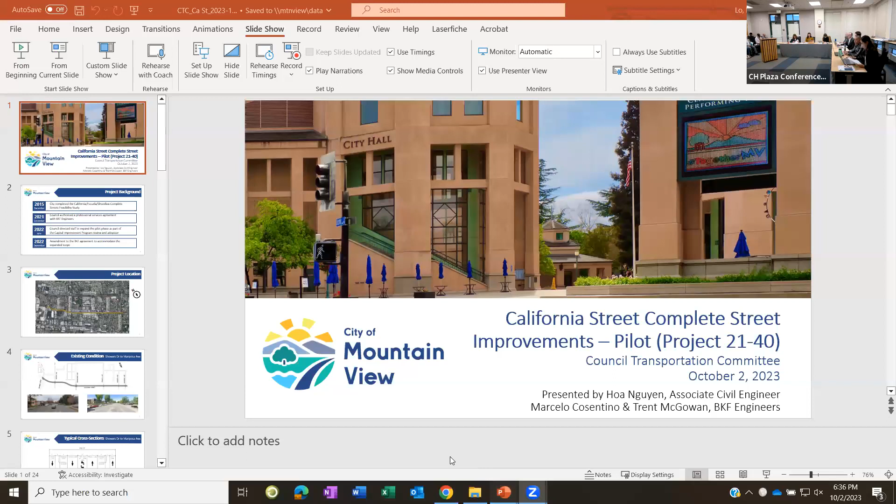Good evening, everyone. Good evening, committee members. My name is Hoa Nguyen, I am an Associate Civil Engineer with the Public Works Department. I'm here today to provide an update on the design of the pilot phase for the California Complete Street Improvements and to obtain feedback from CTC on the corridor layout, including vertical elements. Joining me in this presentation are Marcelo Cosentino and Trent McGowan, design consultants from BKF Engineers. Next slide, please.

Background: In 2015, staff completed the California Escuela Shoreline Complete Street Feasibility Study. The objective is to create safe, comfortable, convenient conditions for travel modes, including automobile, pedestrian, bicycle, and transit, starting out with a pilot program using pavement markings and temporary improvements.

In December 2021, Council authorized a professional services agreement with BKF Engineers for designing the pilot phase with limits from Showers Drive to Ortega Avenue. In June 2022, Council directed staff to expand the project limits to Shoreline Boulevard. In September 2022, Council authorized an amendment to the BKF agreement to accommodate the expanded scope for this pilot phase. Next, please.

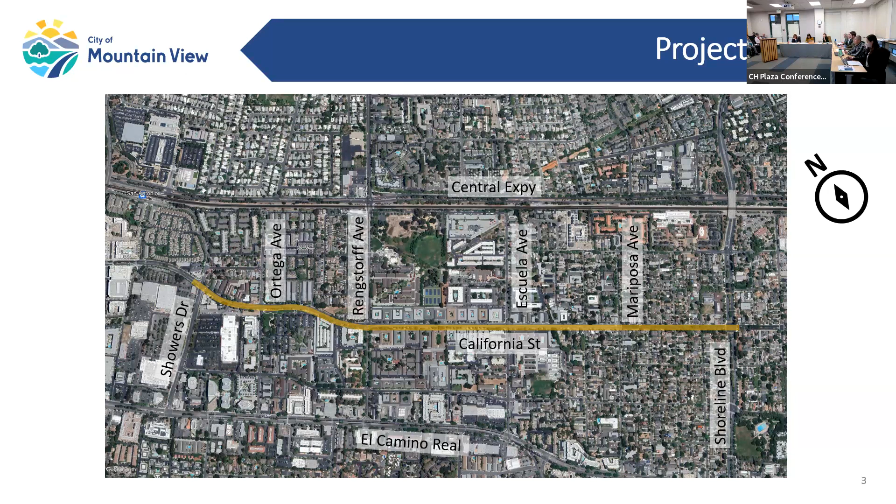Next slide, please. The existing condition can be split into two segments. The first segment is Showers Drive to Mariposa Avenue. The corridor has 2 through lanes in each direction, parking on one or both sides, and in some areas a 2-way center left turn lane. In this segment it's primarily multifamily housing.

There are striped bike lanes next to the curb if there's no parking, or between the parking and the through lanes. There are some challenges on this corridor, including high speed of vehicles, limited crossing opportunities for pedestrians, and minimal bike infrastructure. There's no buffer between the parked cars and the bikes, and no buffer between fast moving vehicles and the bikes. There's also frequently delivery vehicles that block what is left of the bike lane.

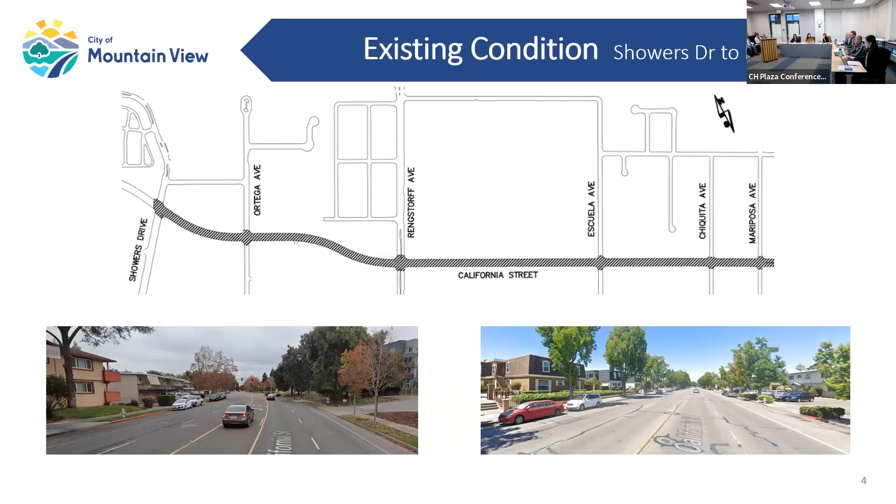Next slide, please. Second segment is from Mariposa Avenue to Shoreline Boulevard. This segment is primarily single-family homes. The center of the road has a landscape median that will stay, along with all the landscaping in it. This segment also has 2 lanes in each direction, parking on each side, and a bike lane striped between the parking and the travel lane.

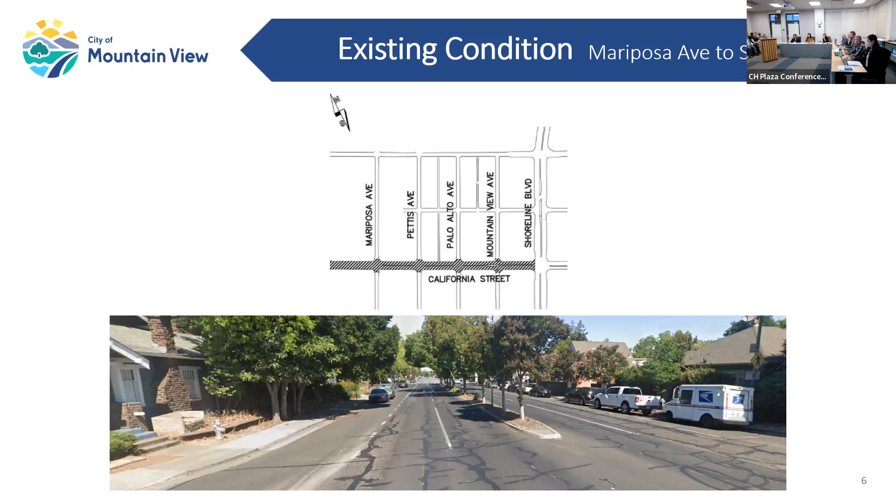To continue talking about improvements, I'll pass it to Marcelo. Thank you, Trent. Good evening, community members and attendees.

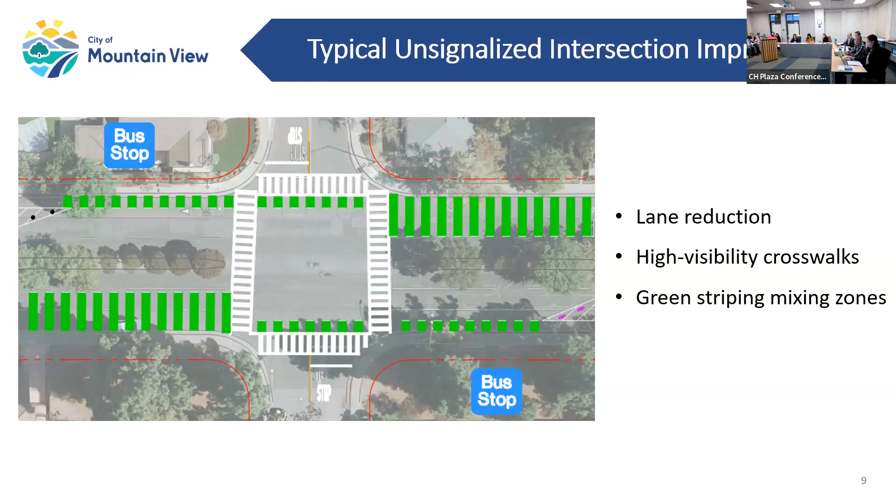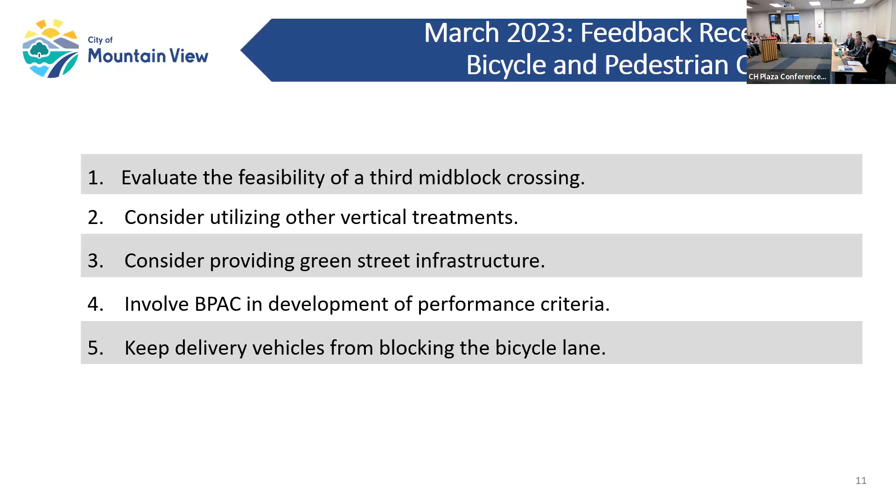Next slide, please. Now we'll walk you through the corridor so you can see where we're applying these vertical elements. We're doing this to test the different vertical elements and see how they function along the corridor. With the parking protected improvements and vertical elements, we expect there will be a loss of on-street parking to accommodate this new configuration.

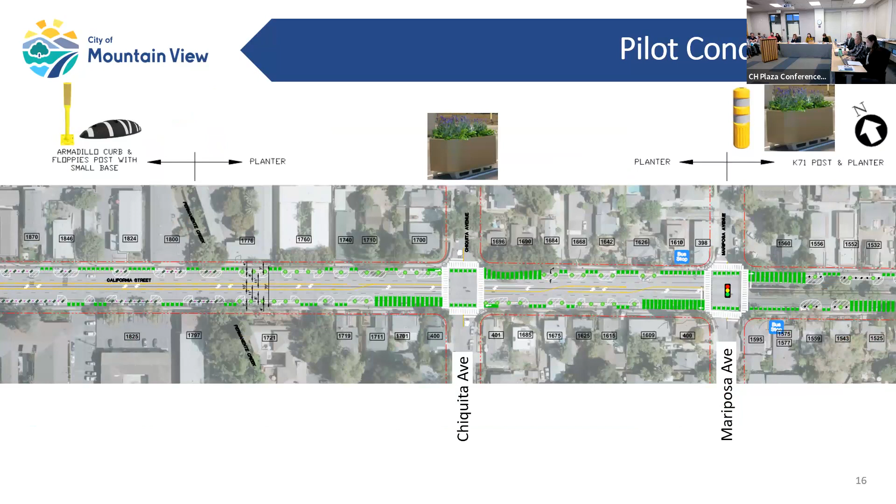Next slide, please. From the mid-block east of Chiquita to Mariposa, we're installing planters. And from Mariposa to Pettis, we're installing K71 posts and planters.

From Pettis to Palo Alto, we're installing K71 posts. And from Palo Alto to Shoreline, we're installing floppies with the long base. Parking here will be affected as we introduce the mixing zones and addition of parking protected bike lanes.

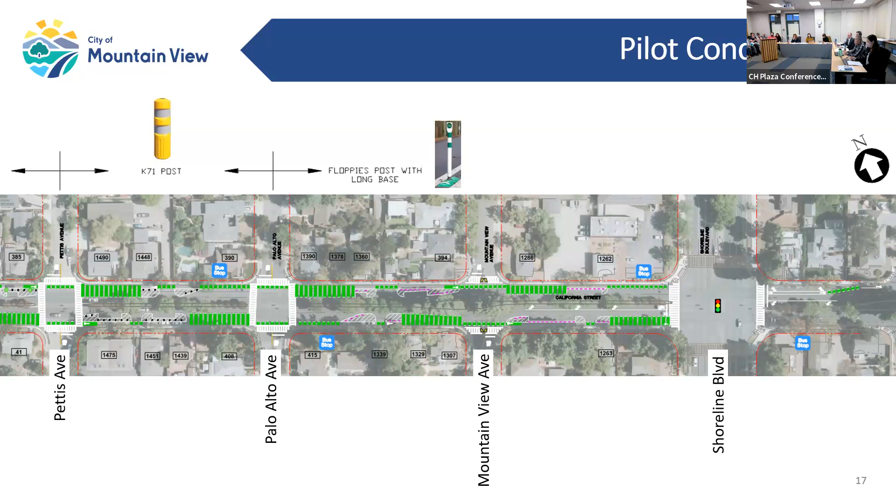Now I'll hand it out to Hua, who will discuss the next steps. For next steps, we anticipate completing the design by spring 2024 and starting construction in summer 2024. After the design is complete, staff will return to BPAC and CTC to identify the criteria for determining the effectiveness of the pilot.

We are looking for CTC feedback on the review, the corridor layout and vertical elements. Thank you. Thank you.

So I'll bring the item back to our committee, and do any member of the committee have questions? Start with Mayor Hicks. I'm going to say thank you very much for the visuals. I did talk to a resident who found some of the terms technical and hard for residents. I'm new to this committee, so I'm going to ask for some definitions before getting into the meat of the issue.

Can you explain to me what a corner rubber curb bulb out is? Sure, let's see. Do you want to go to the slide that shows that element, or you can describe it if that's easier.

So, in essence, rubber curb is a temporary type of curb that's either held into the existing asphalt concrete pavement or adhered via some sort of adhesive, preferably both. The island at the intersection, the protected intersection, essentially extends into the intersection, and the rubber curb delineates that island. Traditionally you'd use vertical elements such as posts inside of that to further draw attention to the intersection, at the height of like a driveway.

So it's going to be a curb made of rubber. Okay, and also, this was in the staff report, what are advanced stop bars? Advanced stop bars, you can see there right where there's the crosswalks, the high visibility crosswalks. We don't want vehicles to stop right at the crosswalk, so you set that back. I never knew they were called that. Okay, thank you. No worries.

So now maybe the meat of the issue. I understand that this is a pilot and that we're evaluating it, and even planning the pilot has taken a long time. So my understanding is we probably don't want to delay that more, but I would like to know more about how the transition from pilot to long-term solution will go. What things that we decide now will become inflexible in the future?

For example, lane widths — I imagine from what I'm seeing that planter boxes and stripings and bollards all seem changeable. What are the things that become fixed, or are they all changeable in the future?

Want me to take this one, Robert? Go right ahead, thank you. So as part of the preliminary design, we did study, and we pretty much laid out all the permanent improvements.

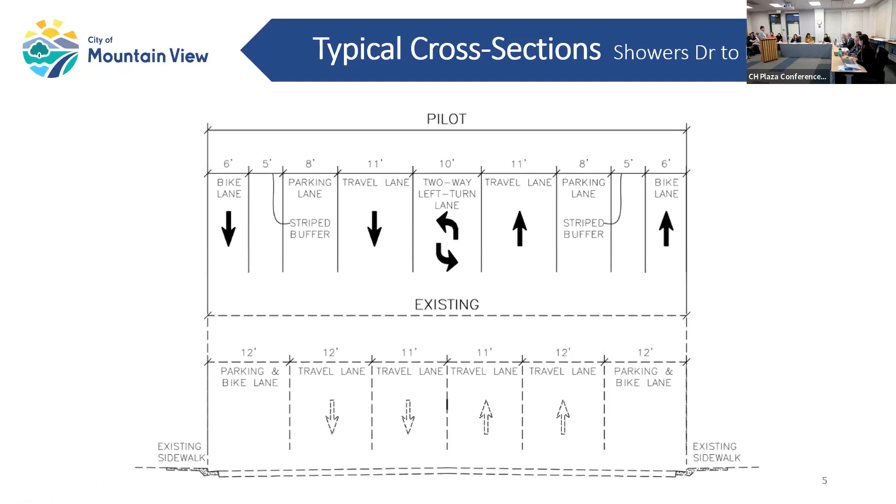The cross section you saw with the 11-foot travel lanes is also the one with the center turn lane of 10 feet. So what that basically means is you get a little shy-away room, a little extra breathing room, because you have that center turn lane when you're in the 11-foot lane. The section of the roadway, and it may still vary based upon right of way, that's 12 feet is actually constrained on both sides. One side is the median we're keeping with the trees, and the other side is your parking lane. So with the buses that go down there, I would like to think, speaking with BKF, that was taken into consideration that you really do want 12 feet when you're constrained on both sides like that, because there are buses that go down here.

I think that's all my questions for now, but if I think of one more, I'll take a second pass.

Councilmember Matichak: I have a question about why are we doing a pilot with so many different vertical elements? I'm assuming you have experience doing these, and so you're recommending this, but I'm trying to figure out what are we going to learn? And what have you learned from other pilots that's saying we should do so many different types of vertical treatments?

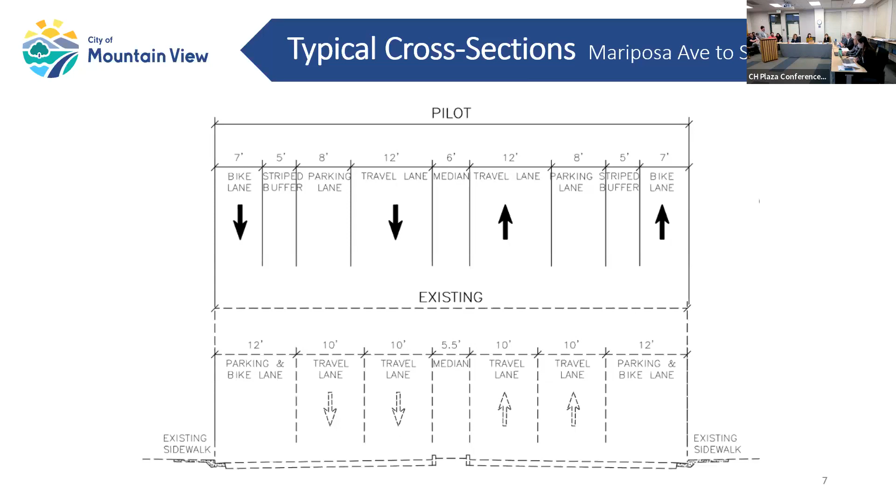Marcelo Cosentino, BKF Engineers: thank you for your question. While a lot of agencies are putting up pilot studies or sometimes permanent improvements with standard delineators, I think the city sought, based on our BPAC meeting, to look at various different types of vertical elements. That's one of the reasons why we started taking a look at these.

If I may give a little context, this corridor is 1.2 miles long. At the BPAC meeting, there were different opinions on what makes for the best vertical elements. Since this is truly a pilot, an opportunity to test, staff said this is a very long corridor, so it really creates an opportunity to test different vertical elements. Then as part of the evaluation process, we'll see how well they function for all users of the road, and that could help inform the more permanent project as well as future complete streets projects.

Did you want to add anything? No, I think that was my point. Thank you. So when you say how well they function, what does that mean? Like people running into them or people disregarding them? What are we going to learn?

So I think there's a couple elements here that we can learn from. One is a sense of safety, so we're going to be looking for feedback from riders and pedestrians, how they feel about certain elements. They don't feel like a floppy is as protective as one of the smaller, fatter ones, the K71s. We'll also see how sturdy they are, how performative they are from a traffic or transportation aspect. Some of these we'll get more call-outs for, for our maintenance crews to repair. So we'll be able to pull in some data and get feedback from users of the corridor, and all of that comes into play when we decide which ones make sense for this corridor.

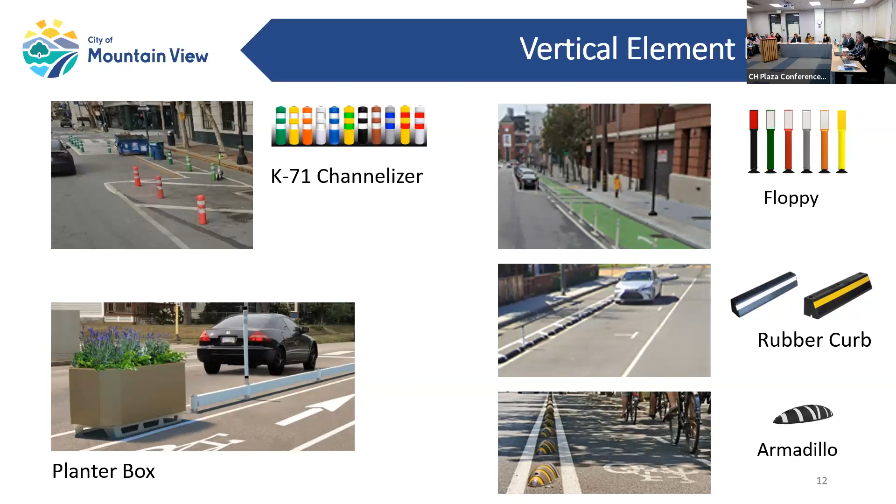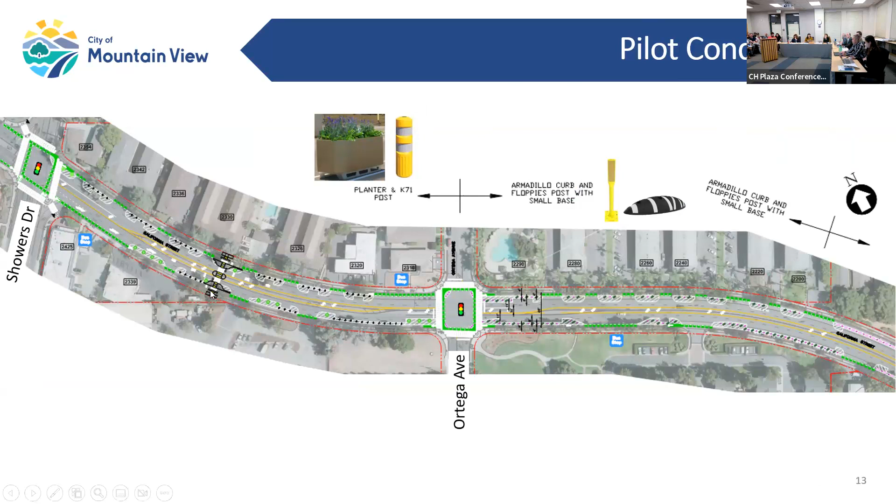So they're not existing? Can you clarify - there are no mid-block crossings that currently exist. So the first one we're proposing is between Showers Drive and Ortega, as you can see here with the mouse cursor. Oh I see, okay. That's the first one, and the second one will be between Rengstorff and Ortega.

This location isn't shown in the exhibit yet, because we're still evaluating the location for this crossing due to existing SFPUC right of way. We're trying not to encroach into their driveway because of the cumbersome permit process. We still need to select the location, but we will include it within the project.

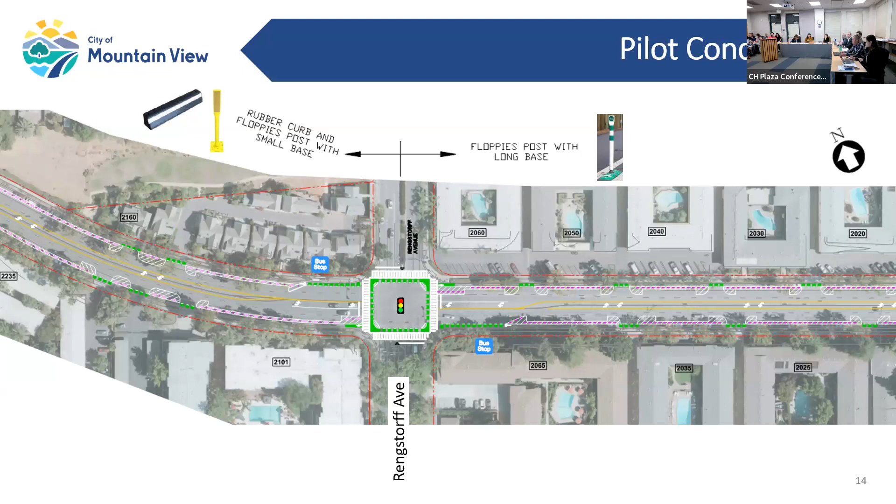I'm just trying to imagine where they are, because I know it's mostly residential on the street, so I'm trying to orient myself. I thought it was helpful that the bus stops are noted on the map, but...

Does the shuttle stop over here? The community shuttle - I know we expanded the route and I just can't recall if it's there as well. I'd love for the map that comes back to council to show where the VTA bus stop is, as well as where the community shuttle stops, and maybe that can help inform some of the mid-block crossings. I don't want to get too far into comments, but that's kind of what I'd like to see.

Is this part of the Safe Routes to School? I know we got a letter from somebody involved with the schools wanting to encourage students to use this. Staff can confirm that. I believe it is on the Safe Routes to School, but don't hold me to that.

I can confirm that. So I would say too, when this comes back to council, if we can just note whether it is part of the Safe Routes to School.

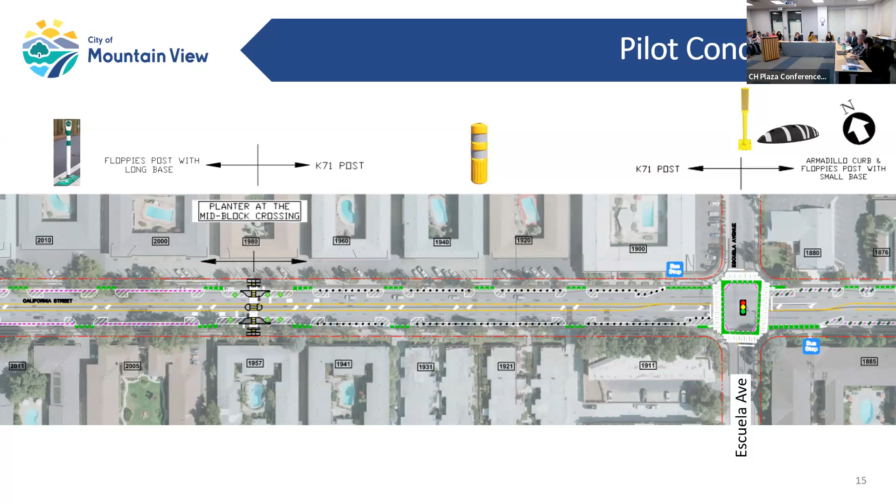And not to try to get to my question, but it's a hostile place to walk. It's hot, it's unpleasant. So for the longer term, and frankly, as the friends I've known who used to walk there, as soon as they were able to drive, they drive now. And that's what we're trying to discourage. We're trying to encourage more walking and biking.

So will the criteria, will it include more than just bike safety and pedestrian safety? Frankly, pedestrians, I know a pedestrian actually was hit there once, but most people, it's just because it's a brutally unpleasant walk is why they don't want to walk there. So are we going to be judging how this affects walkability, which to me, except for the mid-block crossings, which are good, hardly at all.

And how we could improve that in the future. So we expect this pilot to be in place for at least a year. It could be significantly longer depending on funding. So that's why you see such a comprehensive pilot in front of you. While that's in place, we have a lot of opportunity to collect data.

So some of that will be raw data, like we can put down tubes and count cars and approximate speeds. But also we have an opportunity to reach out to the community with a survey, with additional postcards. We can set up a survey online with QR codes. So there's a lot of ways for us to start engaging with the community. We haven't figured that out.

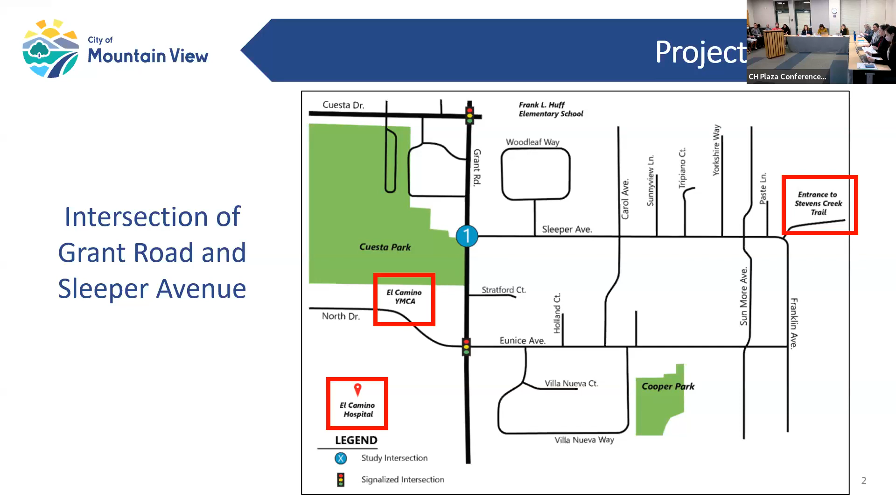Now a little background on this project thus far. In 2018, the city issued a request for proposals for conducting a feasibility study of the Grant Road and Sleeper Avenue intersection. In 2019, the city contracted with TJKM Transportation Consultants to conduct the study and evaluate conceptual alternatives for improvements to facilitate the safe movement of pedestrians and bicyclists crossing Grant Road at Sleeper Avenue. The current conditions, as depicted in this image, show that there is only one marked crosswalk at the eastern leg of the intersection to cross Sleeper Avenue, while a median opening and accessible curb ramps are provided on the southern leg of the intersection to allow pedestrians and bicyclists to cross Grant Road.

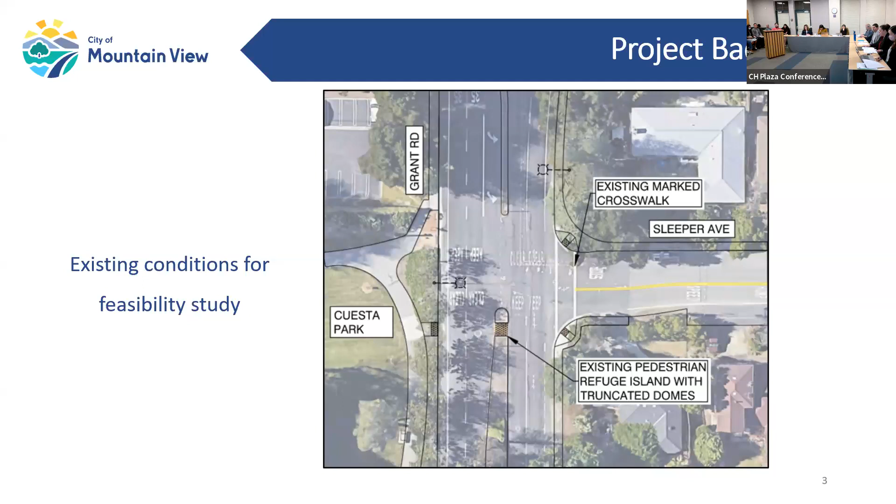The feasibility study culminated in a preferred alternative design, which was presented to and supported by the BPAC and CTC in February and April of 2021, respectively. As part of CTC's recommendation of the preferred alternative, CTC requested that a northern bicycle crossing for westbound bicycle movements be incorporated into the final design. In June of 2021, council approved the preferred alternative recommended by BPAC and CTC with the addition of a northern bicycle crossing.

The image here shows the preferred alternative design from the study, which included a pedestrian hybrid beacon or PHB on Grant Road, high visibility crosswalks on the southern and eastern legs of the intersection, a left turn restriction from Sleeper Avenue onto Grant Road, adaptive traffic signal equipment and signal interconnect, streetlights, and enhanced signage and striping.

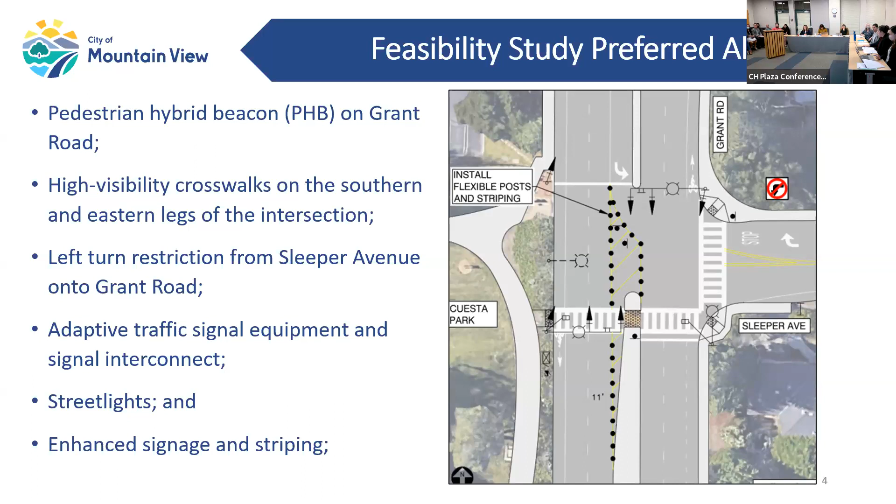Which leads us to today's preliminary design. BKF and staff coordinated on the northern bicycle crossing for westbound cyclist movements, and the new preliminary design includes all the elements from the approved preferred alternative with the following additional improvements across Grant Road.

A high visibility northern pedestrian crosswalk and associated ADA curb ramp, plus northerly and southerly bicycle crossings, including green markings, bicycle ramps, and pathway access.

Blank out signs will be activated in conjunction with the PHB to indicate a no right turn restriction for westbound vehicles on Sleeper Avenue. A median island will improve visibility of the left turn restriction from Sleeper Avenue to Grant Road, and PHB push buttons will be provided for cyclists.

For those unfamiliar with how a blank out sign would be integrated here, let me provide a little more detail. Once the PHB is activated by pedestrians or bicyclists via a push button, the intersection will function as a full stop for all vehicles in all movements once the solid red indication turns on for the northbound and southbound of Grant Road.

The activated blank out sign will illuminate in conjunction with the PHB activation, prohibiting right turning vehicles from Sleeper Avenue onto Grant Road that would conflict with pedestrians and bicyclists crossing Grant Road.

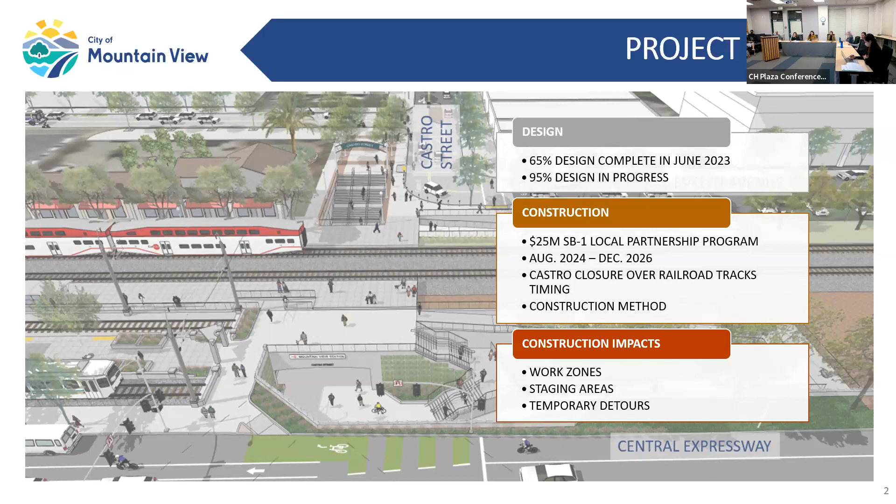Some other news about how this is progressing: we've been actively working on the artists and public art selection process with the Visual Arts Committee, following the usual process we do for all capital improvement programs. The committee in July, after a robust selection process, including paying finalists a small stipend to further develop their concepts so the committee would have more to look at and work with. You can go back and look at their meeting packet for more information, as these graphics come out of it. The artists they've selected are looking at two major art installations.

One would be up on the upper concourse area against where you enter the rail platform areas, which could be more of a vertical sculpture element. I understand the theme is more around 'home.' The other would be mural wall treatments for the main concourse area leading into a treatment on the grand staircase, with a theme again combining what is Mountain View and home. What's being contemplated is like a map of Mountain View on the staircase.

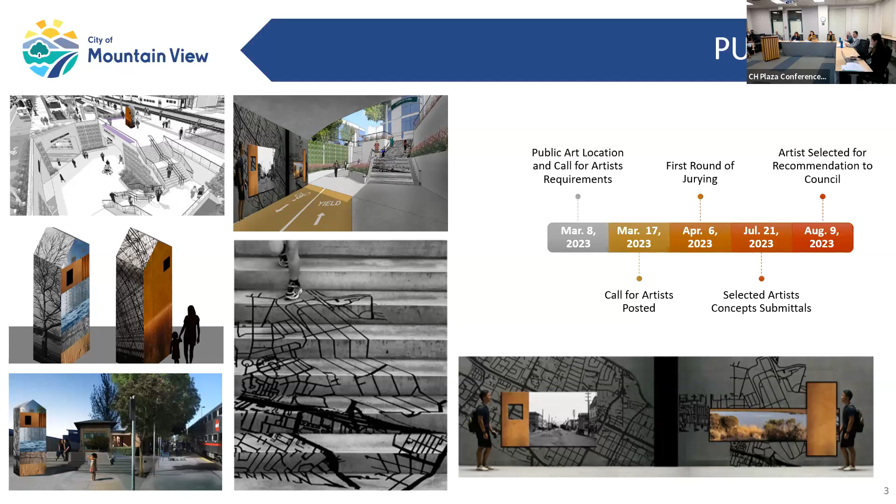I've seen a lot of this artist's work who was picked. If you're interested in saying more about it, I'd encourage you to look at the entirety of her work. I know some people on the Visual Arts Committee.

We are on the agenda for your next meeting on November 28th, bringing an actual agenda item forward, and I want to give you a heads up of what to expect. We'll bring forward more information about the architectural treatments being developed, with the goal of making sure they're complementary to the public art so you get a really good, integrated, seamless approach to the look, feel, and visual experience for the whole project. We'll also talk a lot more about construction impacts—we'll have a better sense of what we're talking about—and we're working on a communication plan for how we're going to handle this, because this is a big project.

We are refining the Moffett Boulevard design in terms of the street treatment for bicycles for that first block of Moffett as it comes in and gains access to the undercrossing. We're continuing to refine the design of the S-curve that Evelyn's going to connect through, which does start to impact a little bit of Centennial Plaza. So we wanted to bring that forward.

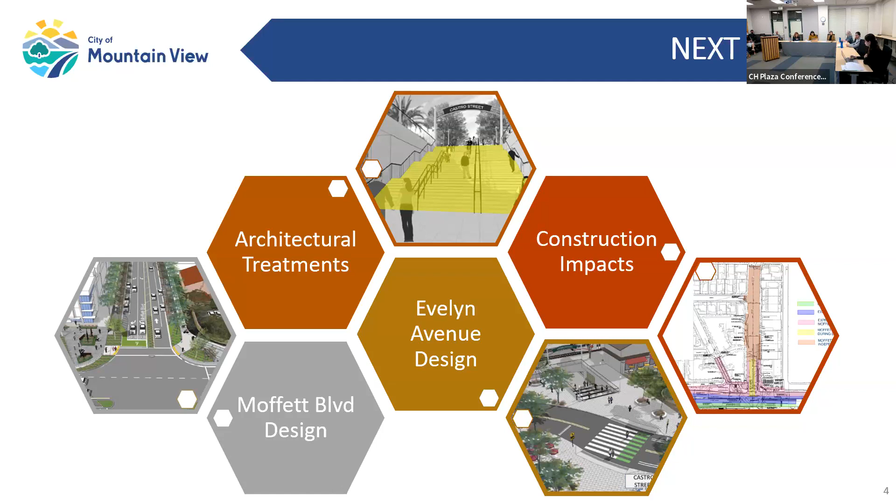All right, moving on to my second item. As you've seen this year and a bit last year, I'm happy to say that as we finish filling our vacancies in engineering and start to catch up, we're moving forward a lot more projects, and many of them generate a lot of public interest. One of the key things I value about the Council Transportation Committee is the opportunity to bring these forward to you before going to full council, for feedback and to hear more from the public.

Because there are more projects, and your meetings have been running long, I apologize for that. Instead of meeting on an as-needed basis for 2024, I'm proposing we pre-schedule 4 meetings, once a quarter. Committee membership can change, but we'd start with what fits best into calendars. I'm thinking a meeting in February, May, September, and November.

Your agendas will be full, but hopefully 4 or 5 hour-long agendas. I'm fine with that. Yeah, as I was saying, it's still Monday. Like a council meeting.